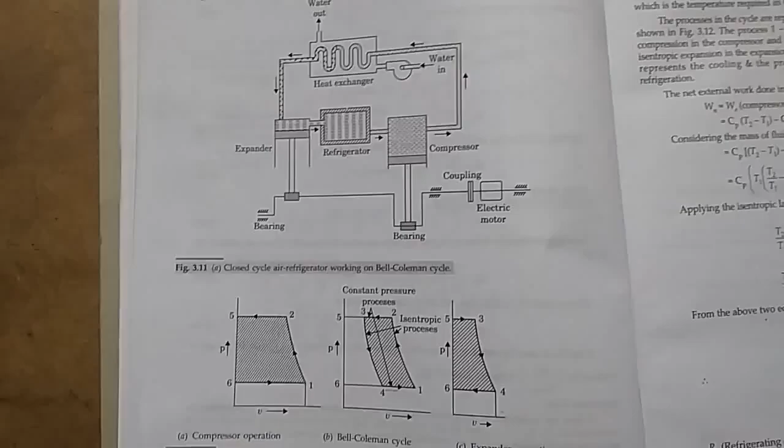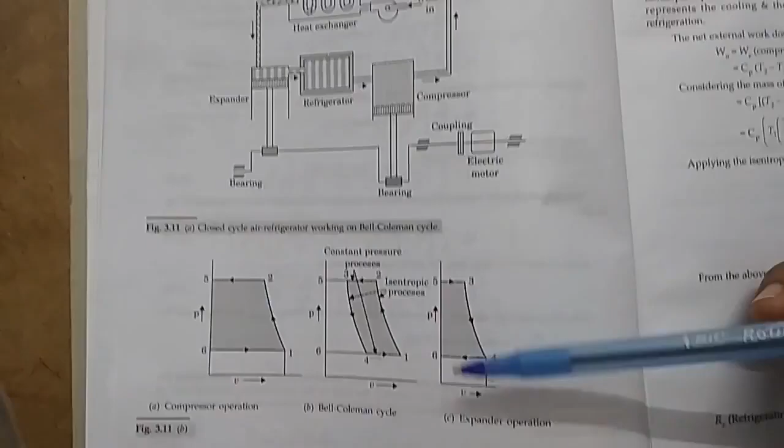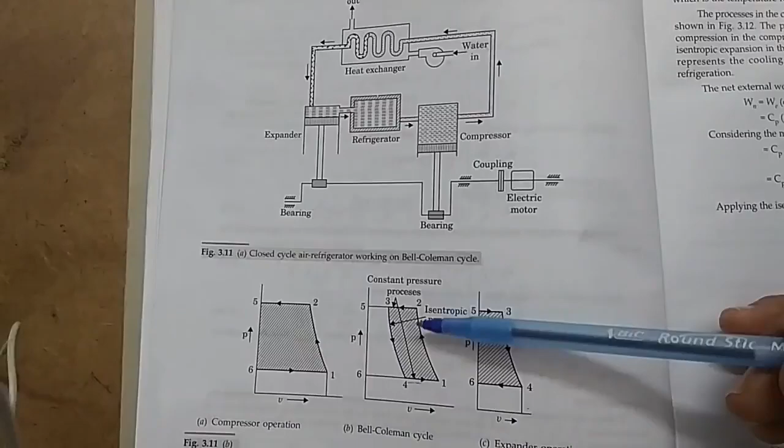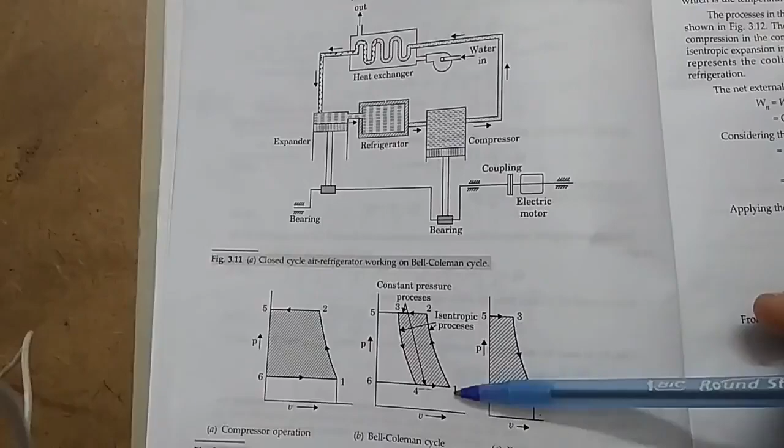As we discussed earlier, this is the Bell-Coleman cycle shown on the PV diagram. Process 1 to 2 is the compression process, isentropic compression process. Here you can see the volume is reduced, but the main point is the pressure is increased to a much higher level. Pressure P1 increases to P2, so pressure is increased very much. This is isentropic compression process, happening in the compressor.

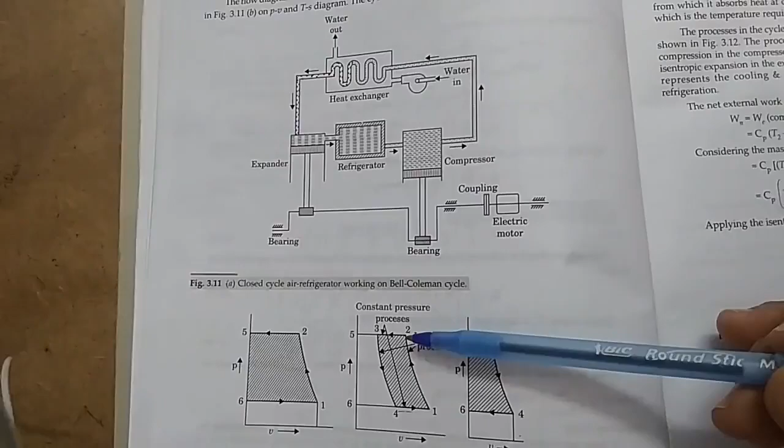The next process in this Bell-Coleman cycle is the constant pressure heat rejection, represented here as 2 to 3. This is constant pressure heat rejection.

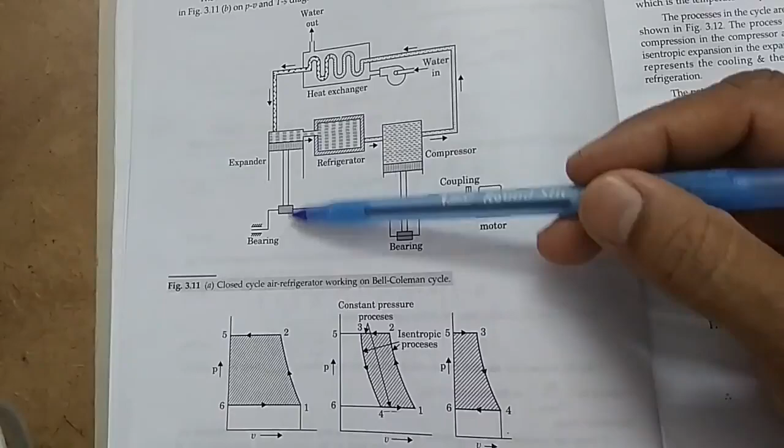Then again, the next process in this cycle is isentropic expansion. Here in the expander, the air is expanded isentropically. So 3 to 4 is isentropic expansion.

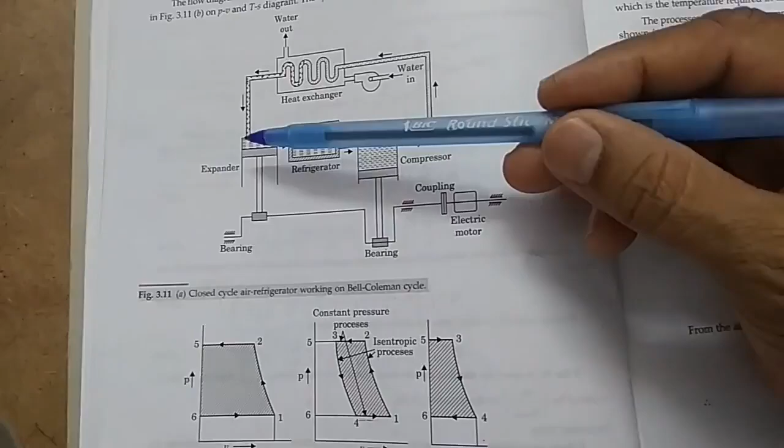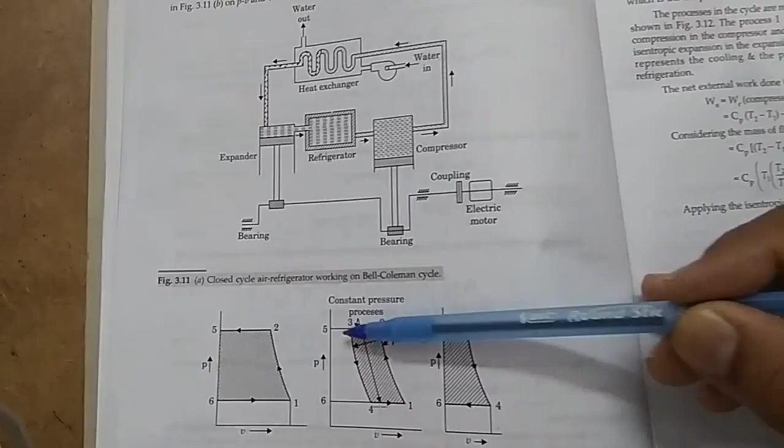But here, one small thing is, before going to expansion, there is a small suction stroke. That means the expander will take a small volume of air. This is the volume of air it is taking, a suction stroke. So 3 to 5 is a suction volume, it will take this much volume of air and it will start expanding.

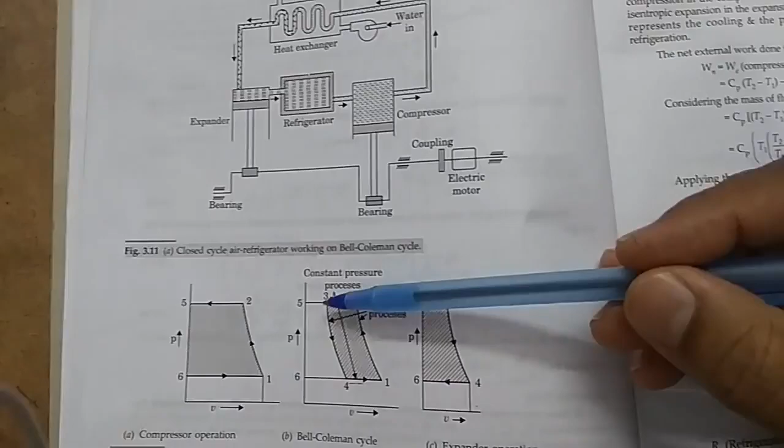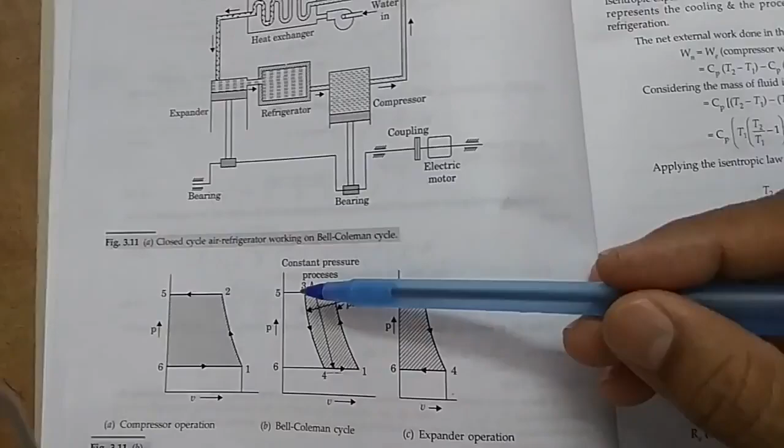It will start expanding from 3 to 4, so 3 to 4 is the expansion process. You can see the volume is increased, and at the same time the pressure is drastically reduced from P3 to P4. That's why it is the expansion process, the pressure will be decreasing very much. So that is isentropic expansion, 3 to 4.

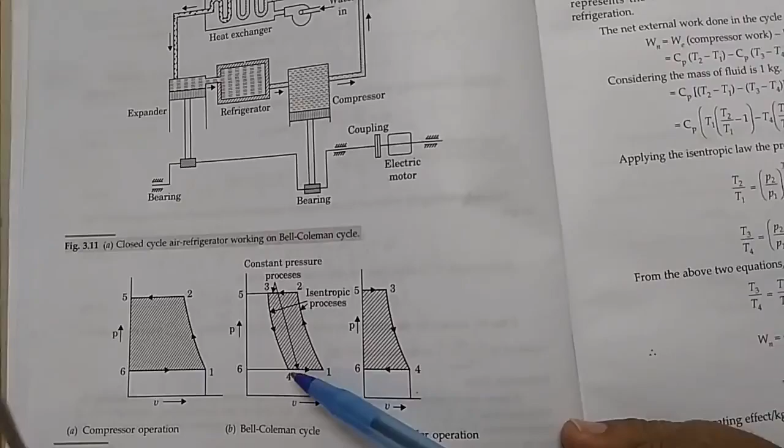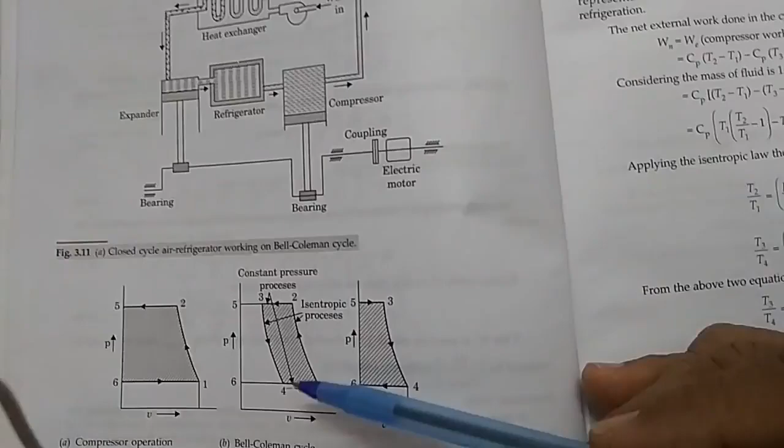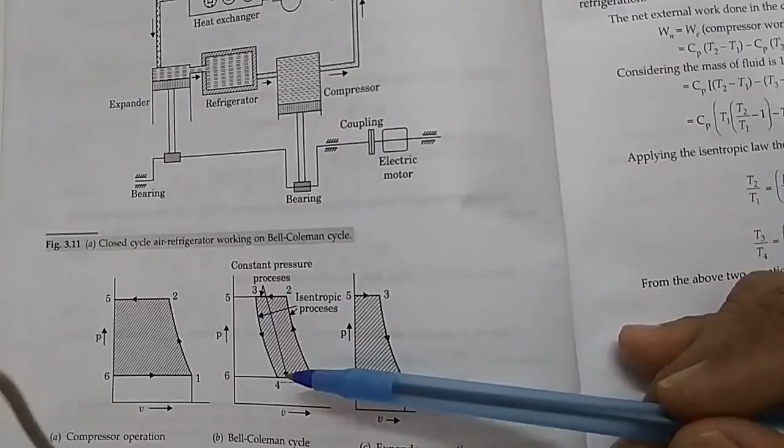Then the next process is in the cold chamber or refrigerator. Here it is going to absorb heat in a constant pressure process. So 4 to 1 is again a constant pressure process. Here the actual refrigerating effect takes place, by absorbing the heat of those food items or whatever is kept in this refrigerator, maintaining constant pressure. That's why it's a constant pressure heat absorption process.

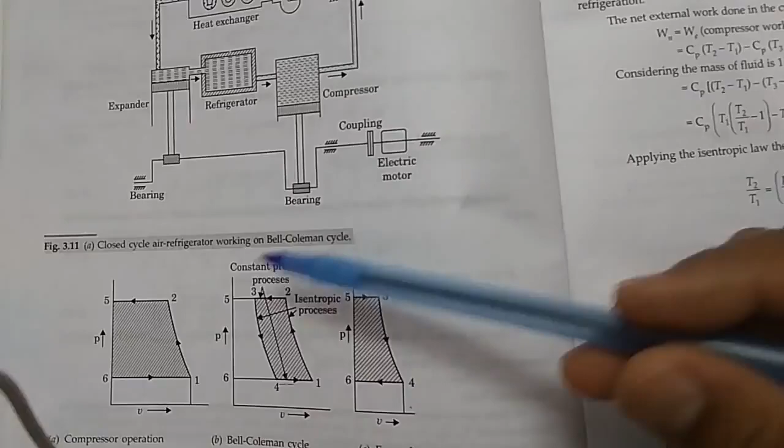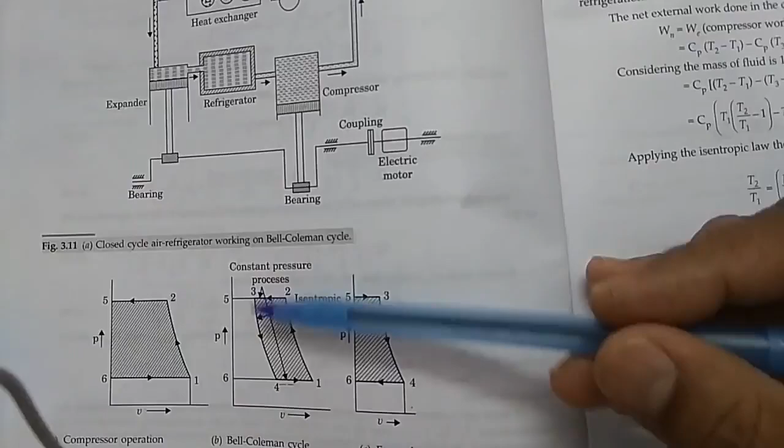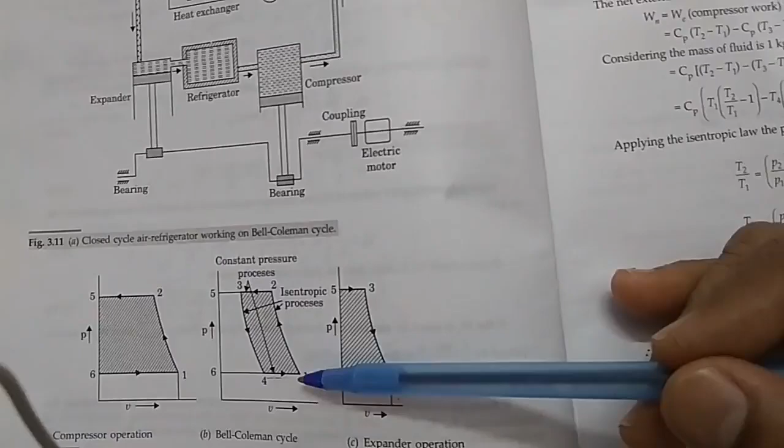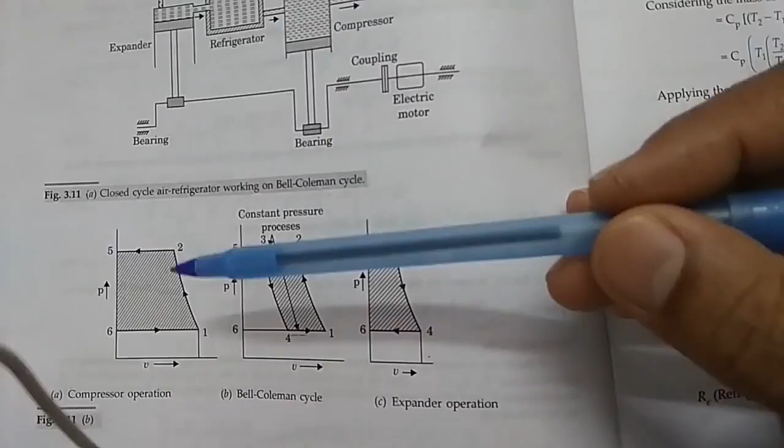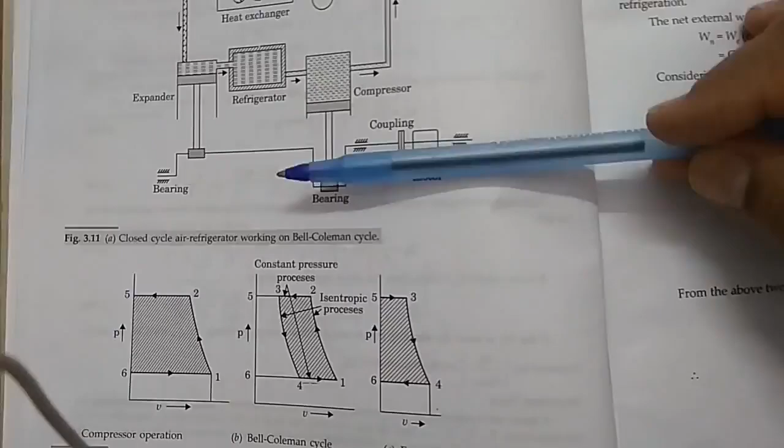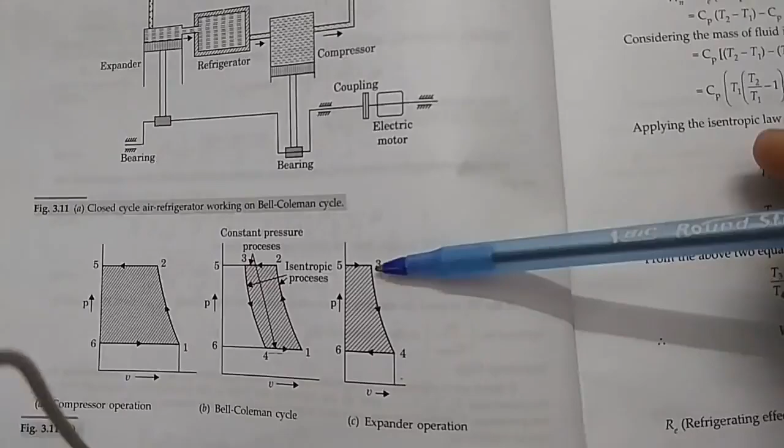Then this is the expander operation. As I told you, it sucks a small quantity of air, then that quantity of air is expanded from 3 to 4. That is why it is the expansion process. So this is the expander.

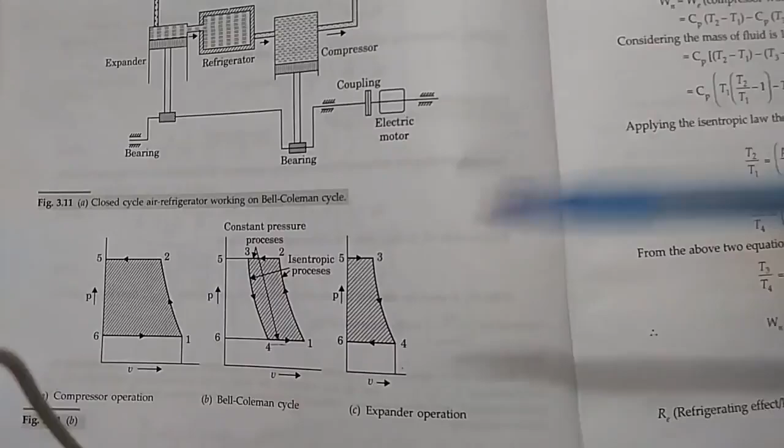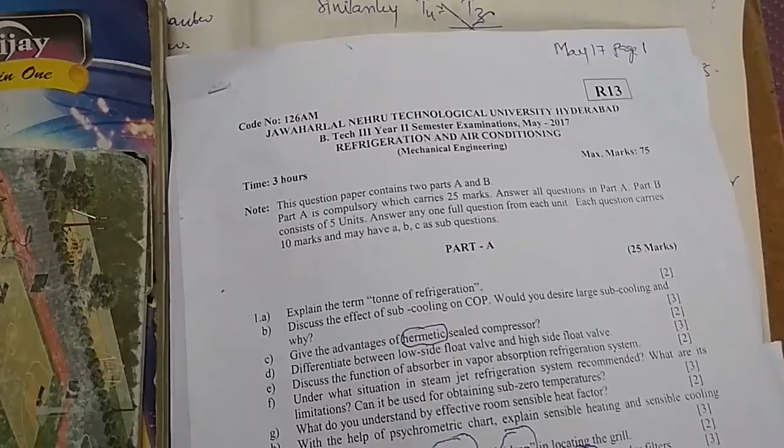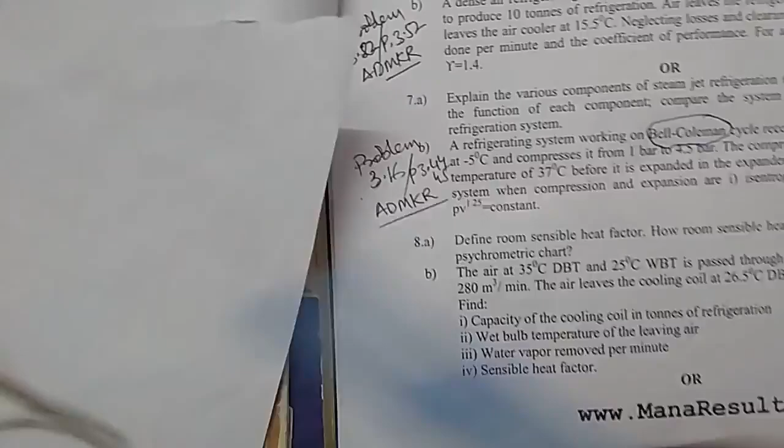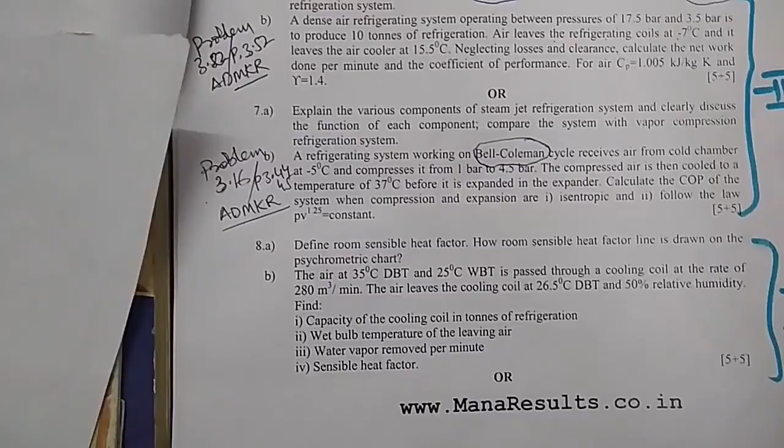Based on this Bell-Coleman cycle, there could be some problems in the examination. Typically at least one problem is asked based on the Bell-Coleman cycle. If you see the old question paper of May 2017 RAC paper, there are some questions based on the Bell-Coleman cycle. In unit number 3, you have two questions coming from the Bell-Coleman cycle. Question 6b is based on the Bell-Coleman cycle, and 7b also is based on the Bell-Coleman cycle. We'll try to solve one of these problems so that we can complete this Bell-Coleman cycle.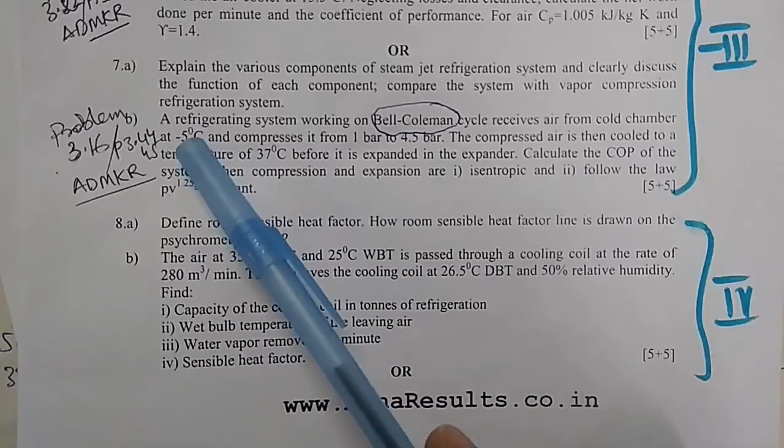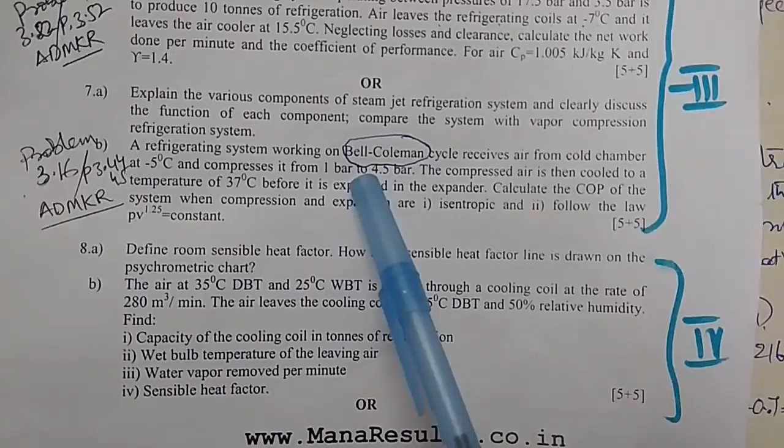For example, take this 7b problem: a refrigerating system working on the Bell-Coleman cycle receives air from the cold chamber at minus 5 degrees centigrade, that is the cold chamber where the refrigerating effect happens, and it compresses it from 1 bar to 4.5 bar, so then compression is happening. Then compressed air is cooled to a temperature of 37 degrees centigrade.

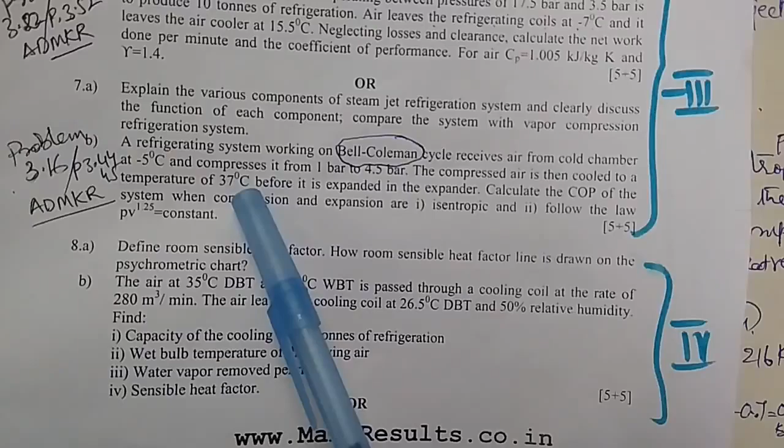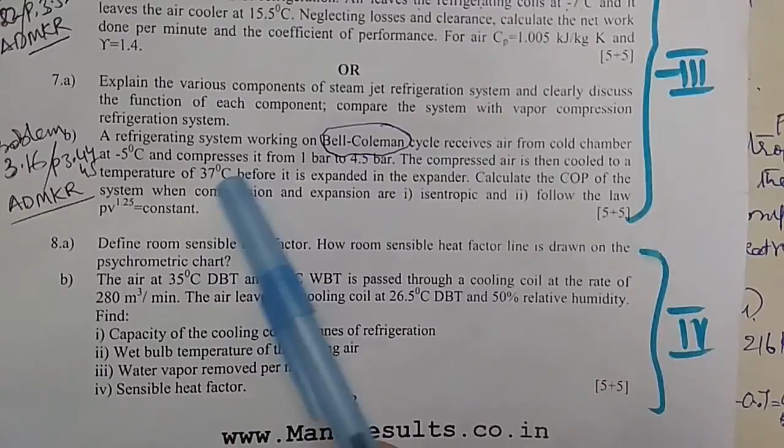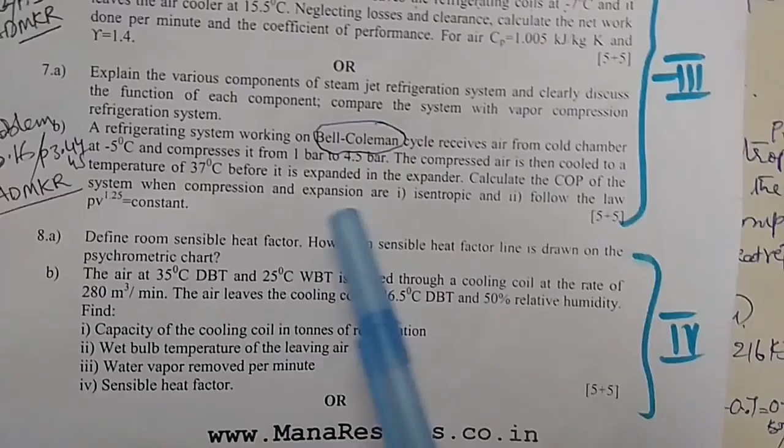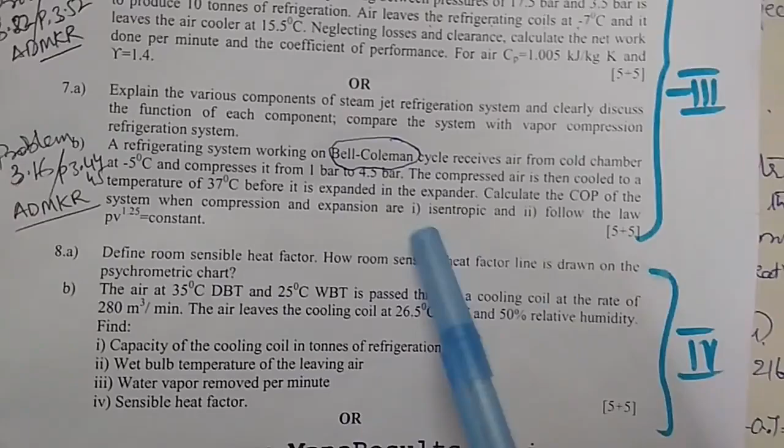So the compressed air is cooled in the heat exchanger to 37 degrees, before it is expanded in the expander. That means after this heat rejection, it is expanded in the expander. Now they are asking us to calculate the COP of the system, that is coefficient of performance of the system, when the compression and expansion are happening in an isentropic way. This is the first scenario.

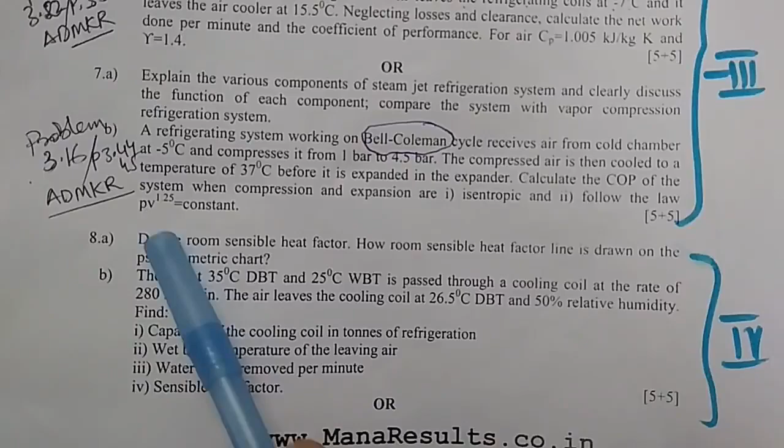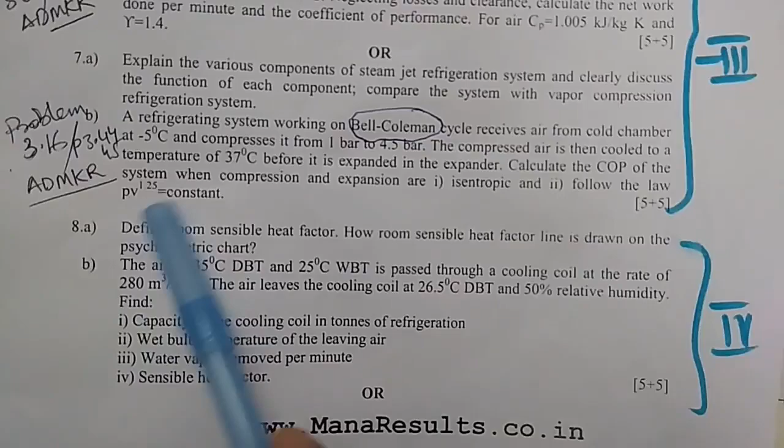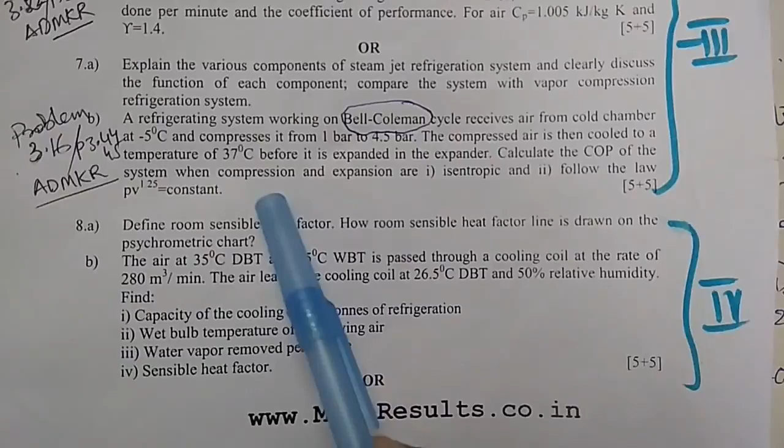Second, we have to calculate COP by assuming the process follows PV to the power of 1.25 is constant, which is nothing but a polytropic process for compression and expansion. So this is the problem: we have to find the COP of the system, first by assuming compression and expansion in isentropic manner, and second by assuming compression and expansion follows the polytropic process. So this is the given problem, we'll try to solve it.

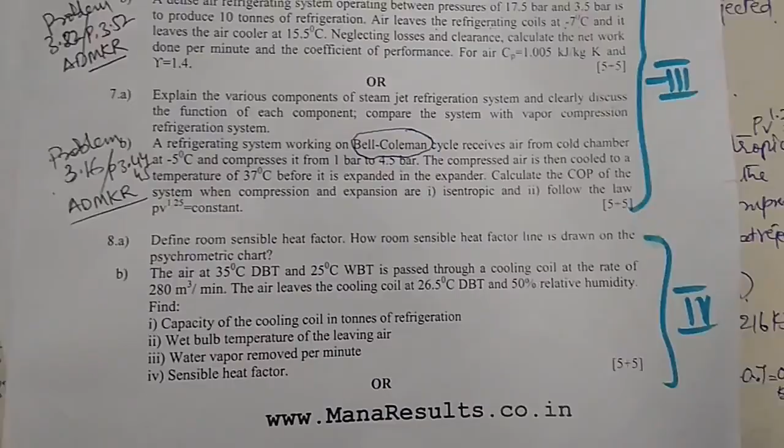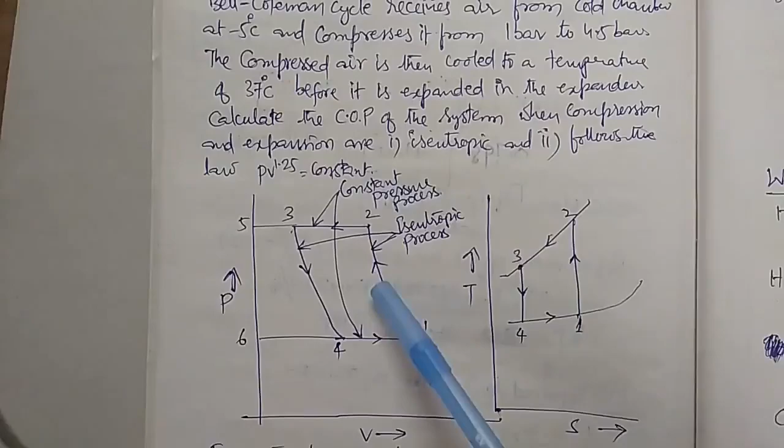I have written down the same problem here. In order to solve this problem, the given information we can represent in the PV diagram, similar to what we discussed earlier: 1 to 2 compression, 2 to 3 constant pressure process, 3 to 4 expansion, and 4 to 1 is the heat absorption, again constant pressure heat absorption.